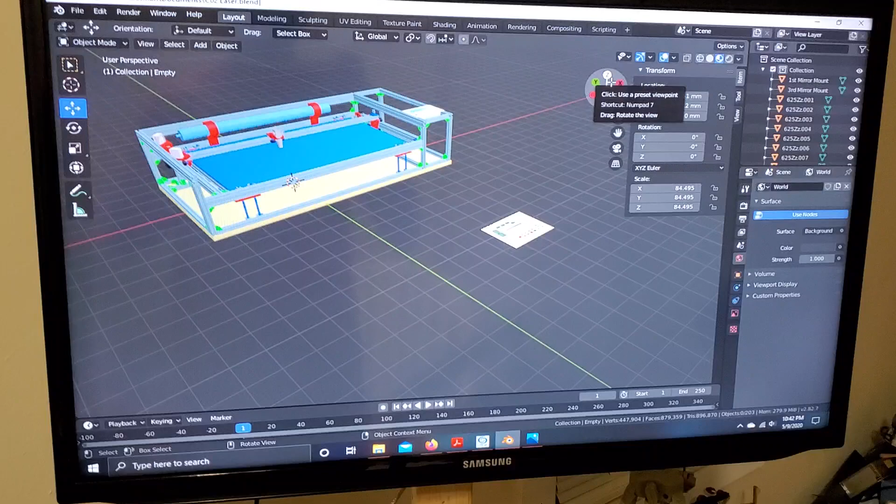Today we're going to be doing a little sneak peek of the new machine that I designed in Blender. Yeah, that's my favorite program. You guys know what it is.

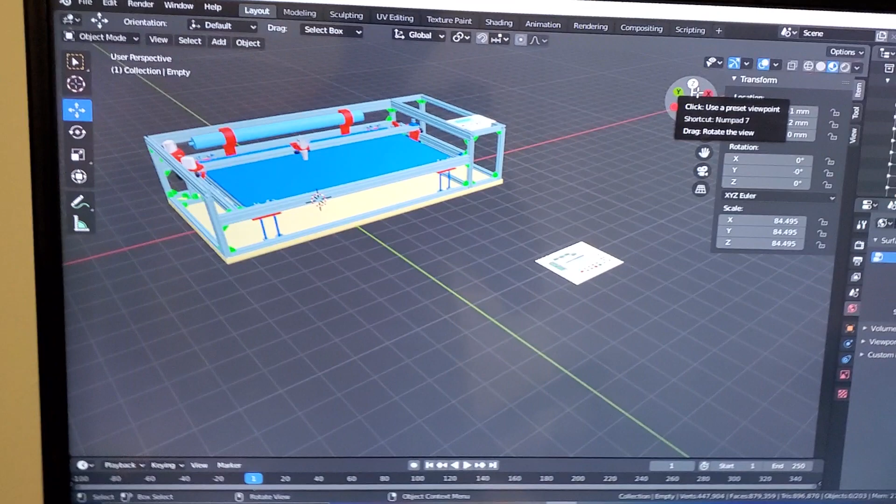In this design, I am making a CO2 laser cutter. Now you're probably wondering, Lee, why the heck are you making another machine? You want to know why? Because all the stuff I want to make has to do with this machine, basically. I am making a company called Animate Every Day, and it's really pretty much made. I just have to start making the items.

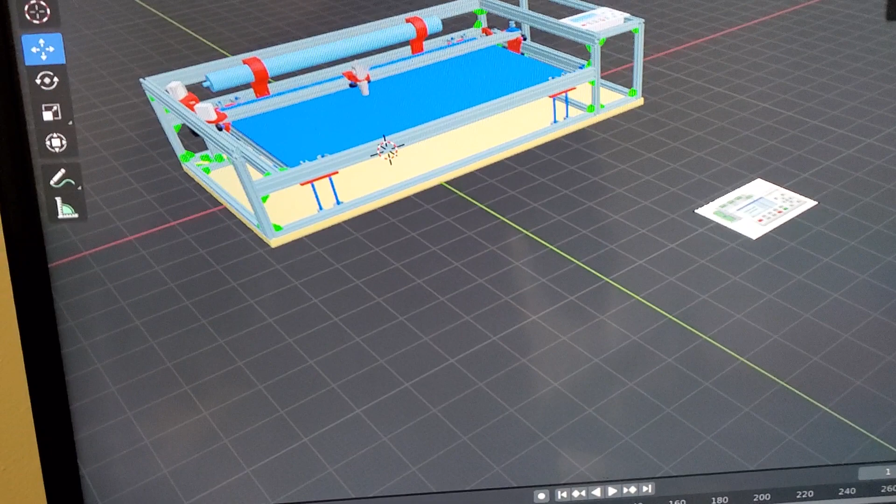I have a lot of plexiglass from another job from way back in the day, just laying around. I want to use that to make the materials for the stuff I want to design for you guys to buy. The laser I have is a 5-watt laser on my CNC machine that I designed a few months back, and it's not the best. It can't cut out clear acrylic, which is mainly what I have. So, screw it, let me get a CO2.

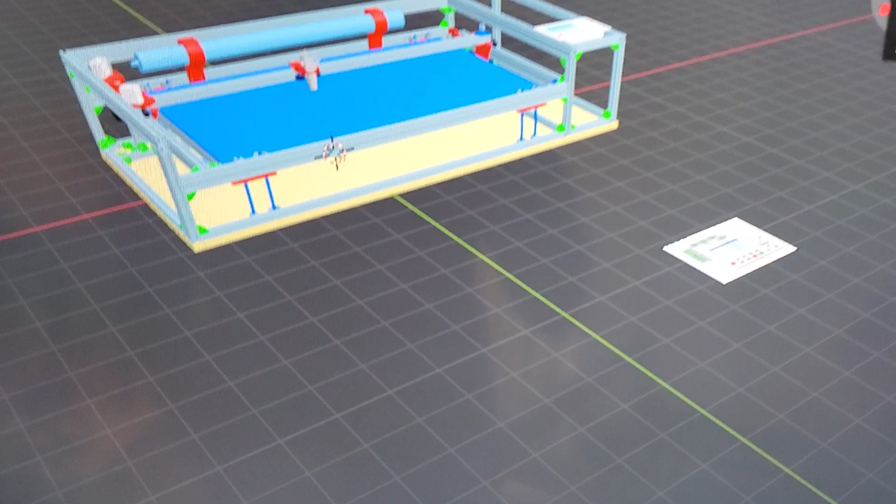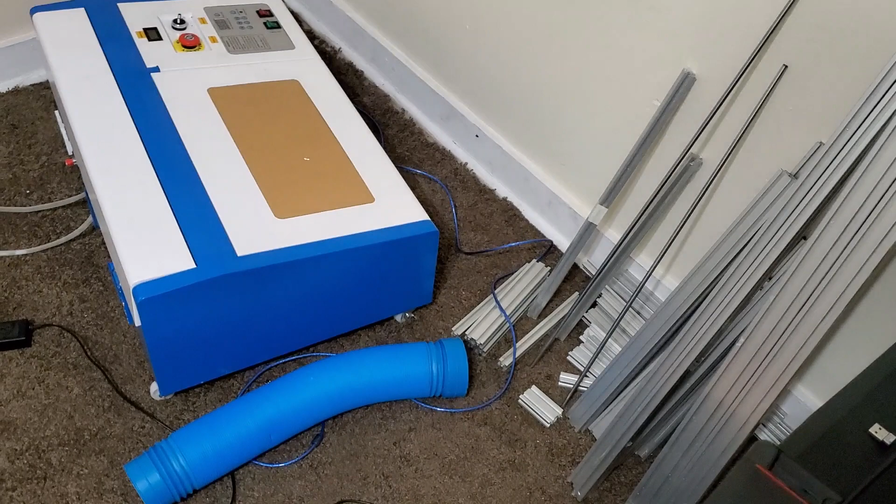So, as everybody does, we look onto the internet and find the K40 laser engraver. Fantastic machine, I guess. A lot of people have their comments about it, but it's a 40-watt laser engraver that theoretically can cut through clear acrylic plexiglass. Now, it's a 40-watt laser, and it's infrared, so you can't see the beam of light.

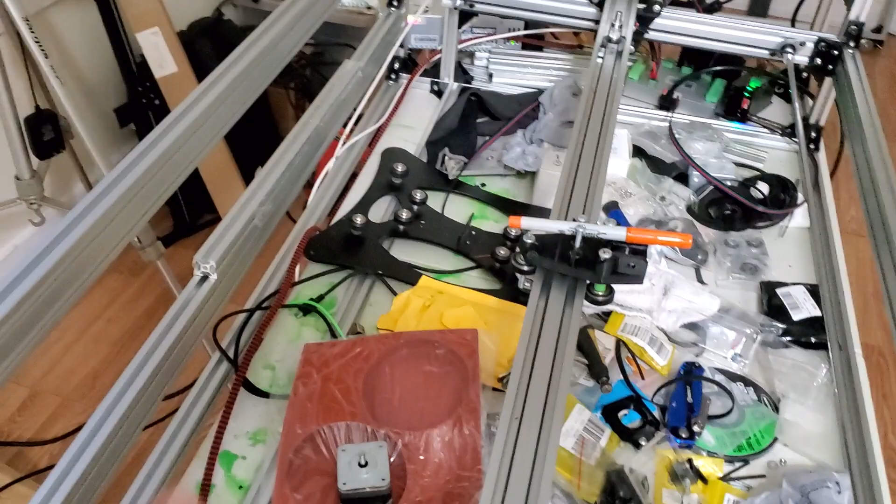I bought this off a guy on Facebook Marketplace, at a steal too. It was only $300. Usually they go anywhere from $320 to $350 new, but I had to wait for shipping and all that. No, I just went and picked this up, and it's basically brand new. Literally, it looked like I took it out of the box, to be honest. It still had packaging foam on it. The guy said he bought it for a project, but never got around to actually using it.

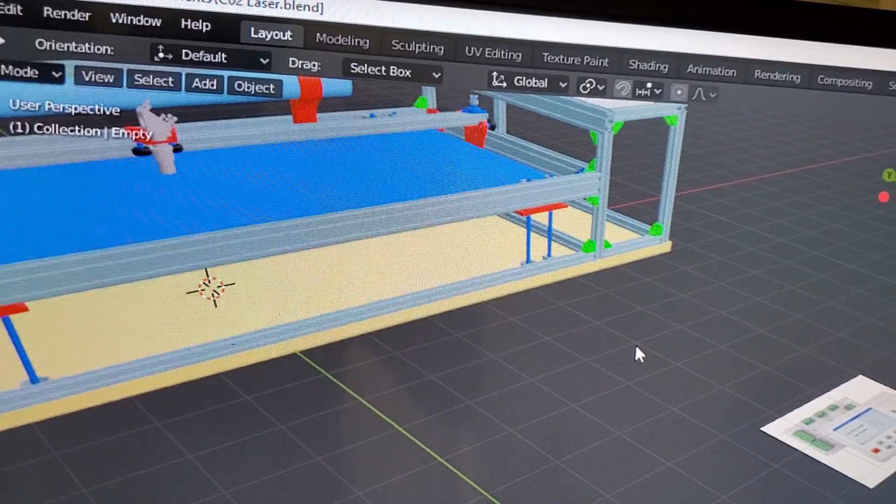Here in the machine, we have aluminum extrusion, 20 by 20, 20 by 40, and then some brackets here that hold the V-wheels in to allow it to travel. I designed these brackets back here. I didn't design everything, I just tweaked what I could from other designs I found and made it work. Blender helped with all that.

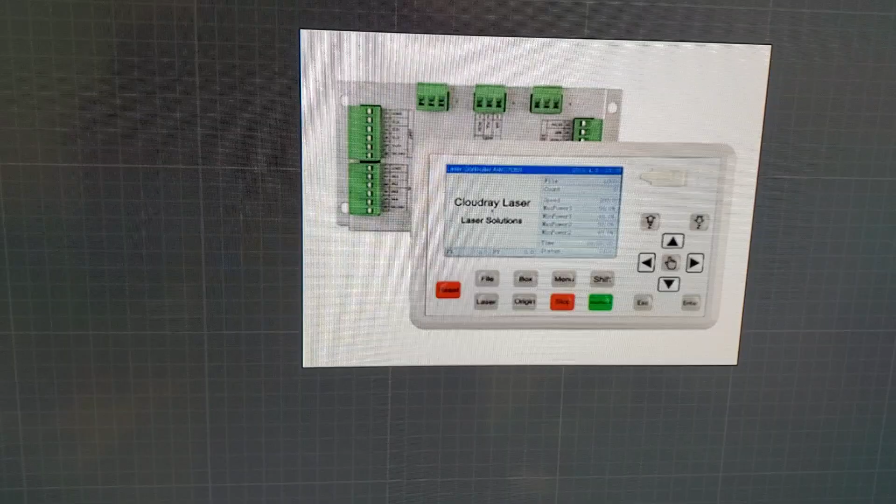What's great about this one is it's a 32-bit processor, so it's faster processing than those regular Arduino 8-bit processors, like the Mega 2650 or 2560, something like that, I forget. All I know is it's faster processing.

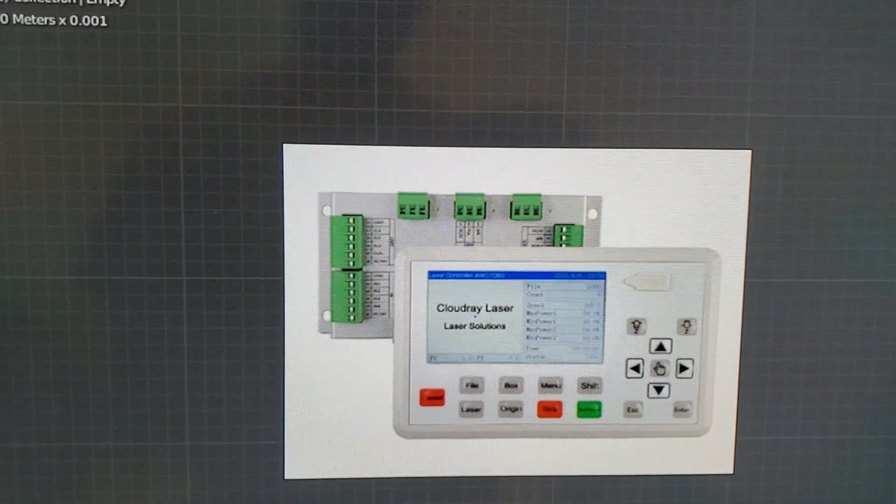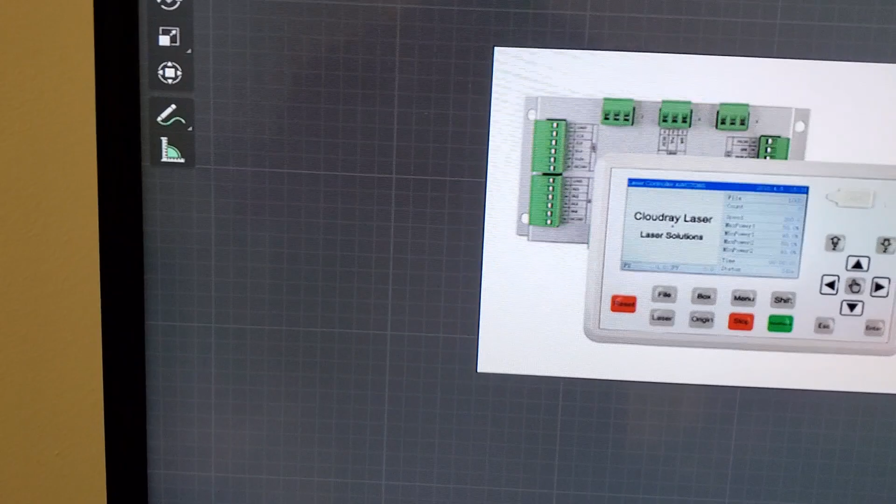This doesn't need a computer. On top of that, you don't need a computer to update the firmware to allow it to know how fast it needs to move, how long it can move, like the length, or where your travel speed amount is.

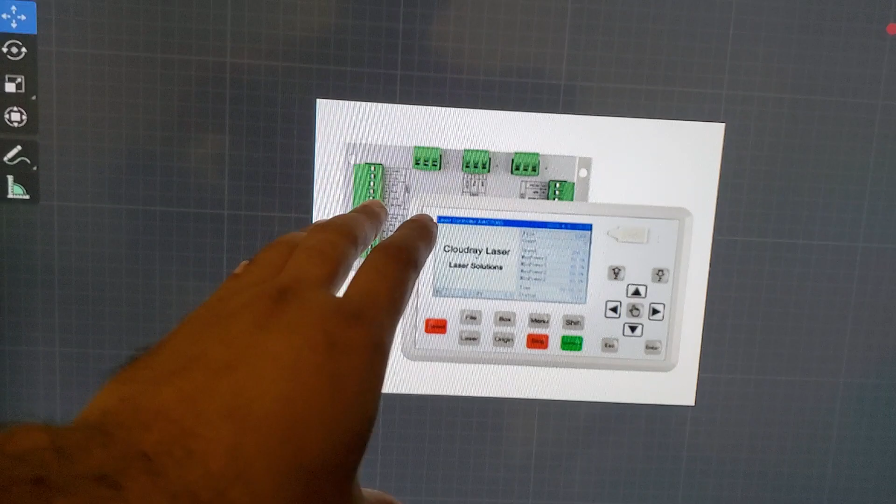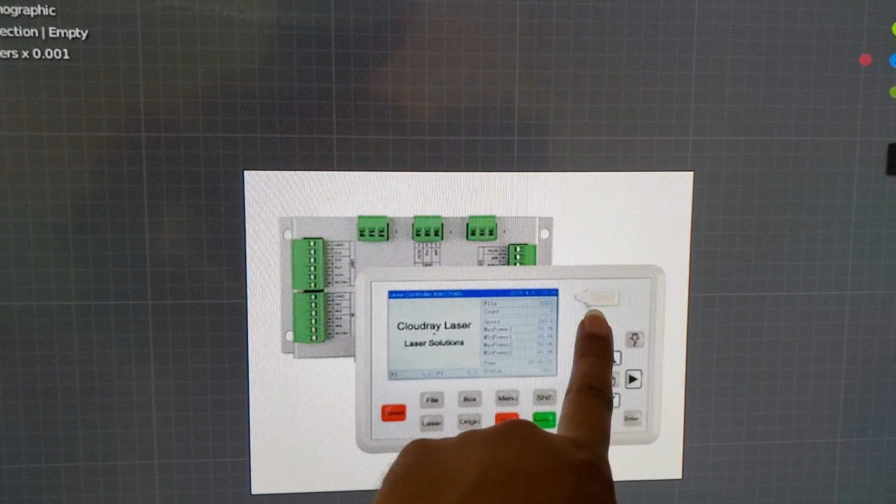So if you can do 1,000 millimeters but it's only set for 500, you can change that here inside the controller itself. Also, if you have a job on a flash stick, like a USB storage device, you can plug it into this USB port and print straight off the drive itself, so you don't need to connect this to a computer at all. It's completely standalone, which is fantastic because nobody wants to sit for hours waiting for a part to print out or cut. It saves on power too, because you don't have to have a computer on the whole time. Anyway, I designed this part completely from scratch, and it's exactly the same replica as the controller itself.

Now, it's not grouped together all in one mesh. These are a bunch of different meshes just sitting in place, but it's fantastic, so I like it. We have the reset, stop, start, the arrows up and down, Z up and down, and the USB port hole.

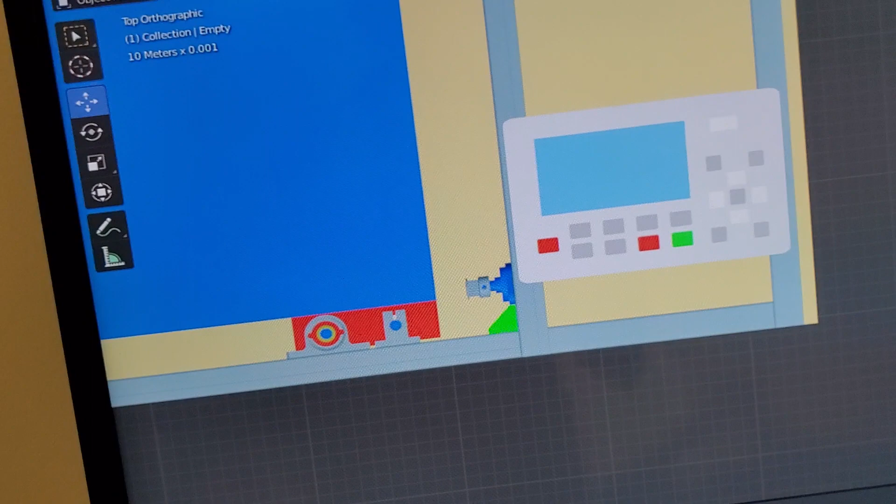Everything is literally the same as it would be in real life. So with that being said, this machine was based off this piece of wood. I have a 2x4, a 2 feet by 4 feet sheet of wood, and that's where this is going to be sitting, like a table.

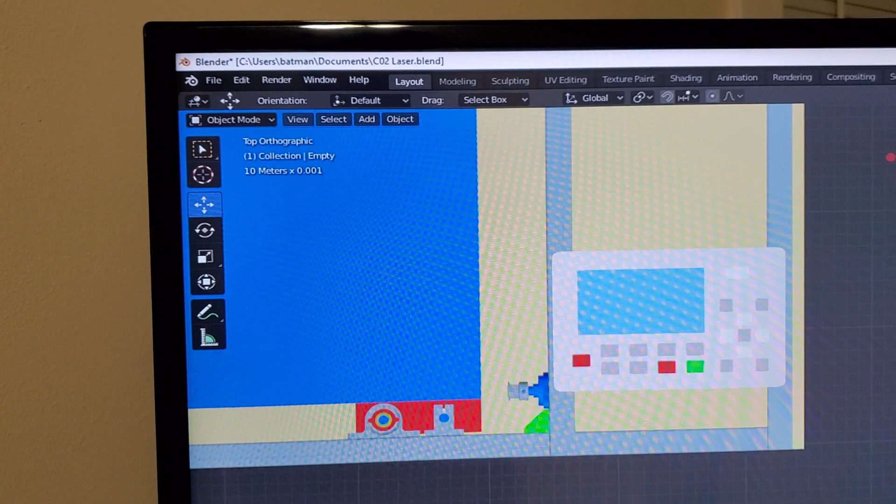I wanted to make sure the machine was really compact so I could get the most cutting space possible. The machine won't need extra aluminum extrusions for extra length or anything like that. I try to do things really cheap. So we go from this design to real life.

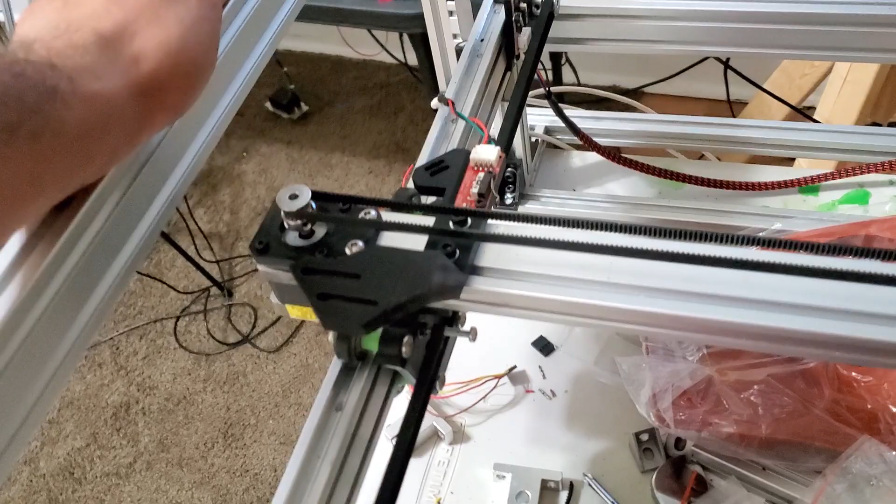Anyway, the machine can move on its own rails, so the extrusions themselves are the rails too. So you don't need to buy any extra parts.

Now I want to go super cheap for a few reasons. One of the main reasons is, since we're in the coronavirus, it's hard to get parts for 3D printers or CNC machines that don't cost you an arm and a leg. China is pretty much out of the water, you can't really order anything from them right now, and that's usually where most people get their parts, like Gearbest and stuff outsourced from China or Shenzhen. You can't get them.

So I'm using stuff I already had here from previous 3D printers and machines I was building over the past few years. They were just obviously storing up, so I was lucky enough to have extra parts.

Super simple design. So we've got 3D printer NEMA 17 stepper motors here and here, then we've got a 3D printer end stop here and here. What's great is I thought the end stop was going to blow, but it didn't. By blow I mean fry out, because I was pretty sure the switch would have kept working, but I thought for sure this LED right here was going to be broken or fry out, but it didn't, so I was really lucky.

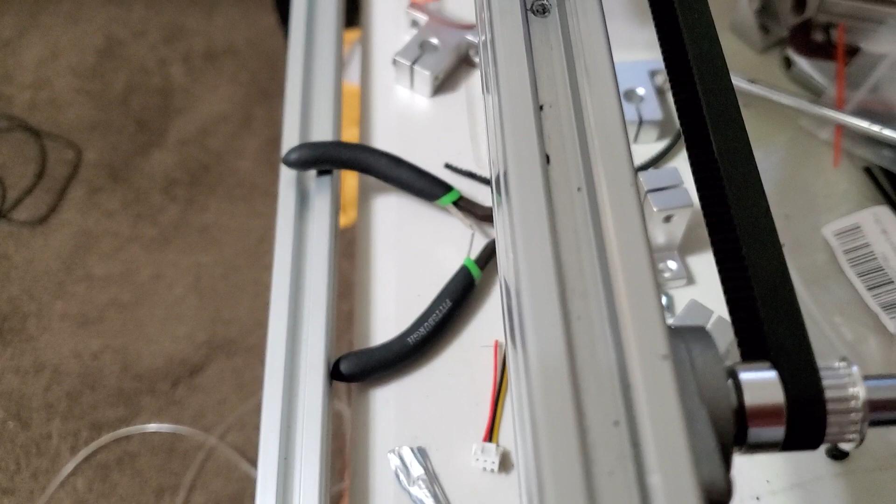Now, if you're new to this channel, I did a video on how to convert a T-slot aluminum extrusion to a V-slot. If you don't know what that is, I feel sorry for you, because you definitely need to find out if you're designing stuff like this. But I'll give you a little breakdown so we can speed through this. T-slot is basically an aluminum extrusion that has a completely flat surface, nothing in the groove. A V-slot is basically a groove that has a V-channel drilled through it to allow things to go through the center.

So you see that little cut right through there, and I'll show how to make that.

Now, the reason why you would like to do that is because we're using V wheels. They're cheap, easily available, I have a huge packet right over here. And literally it's silent too, because they're basically ball bearing or skateboard bearing-ish. They're a little smaller than regular 608 skateboard bearings, but they're actually like skateboard bearings. So they're quiet.

They run around this rubber boot, basically, or rubber grommet, that allows it to move through this channel really smoothly and easily. So you don't have a lot of noise coming out of here like you would with a lead screw. Even linear rails will be kind of noisy because the ball bearings are scraping against the insides of that metal housing, so it's going to be a little louder than a regular bearing.

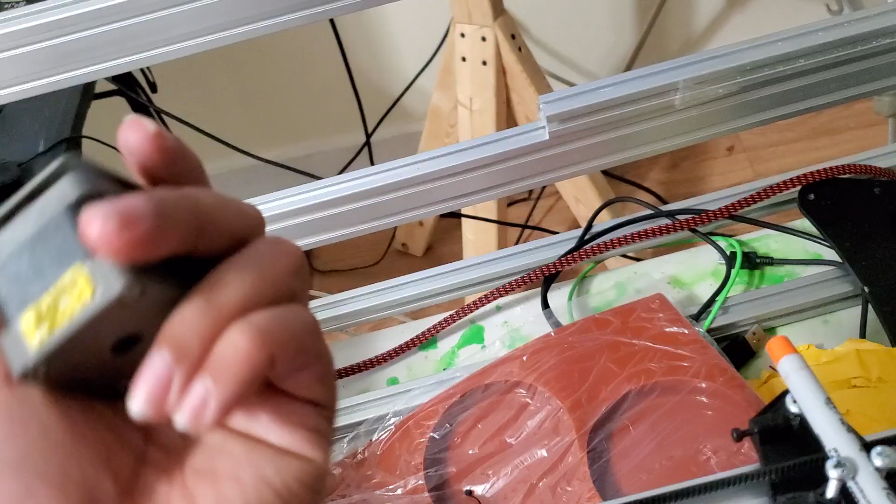Right now this machine is set up for just one stepper motor. For the Y, I do and will be doing 2 stepper motors, one on this side where you can see this belt, and one over here, obviously already on there. This one is broken, I have to get another one out of my office. I have plenty of those, so I'm not worried. But I'm waiting really on a pulley that fits this 5mm shaft and more belts.

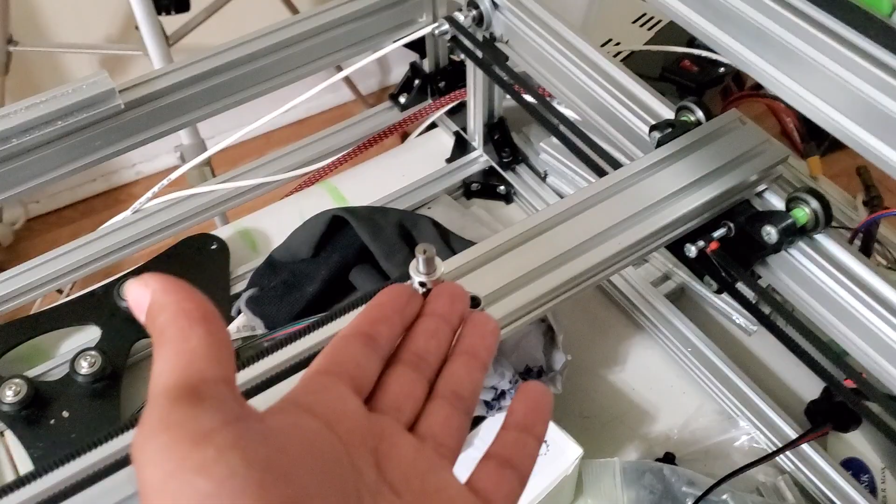I ordered a longer belt that hasn't come in yet, and the reason why I know for sure I need it is because the belt here is too small. I'm missing about 10mm over here worth of travel. I want to get all the travel I can out of my machine. And then also on this side, I'm not all the way on the end of the X, I'm like literally 100mm or more off. So I need to get the belt to move all the way down there.

Now, I do have a pulley here, and this pulley is connected to this bracket down here, the 3D printed PLA, nothing super fancy. And then I have an M4 screw that goes all the way through with another bolt on the inside over here. That is all zip tied up into this belt, which is pulled and tensioned to make it nice and tight, and then it's going onto this pulley. This is an 8mm diameter pulley with 20 teeth on it.

And it's going to connect to this. Basically, it's a skateboard bearing that's press fitted into a housing that makes it look like a pillow block. It's called like the KP08 or KL08 or something like that, I can't remember the exact terminology, but you can get a lot of these for pretty cheap. I got a whole pack of them from like Amazon.

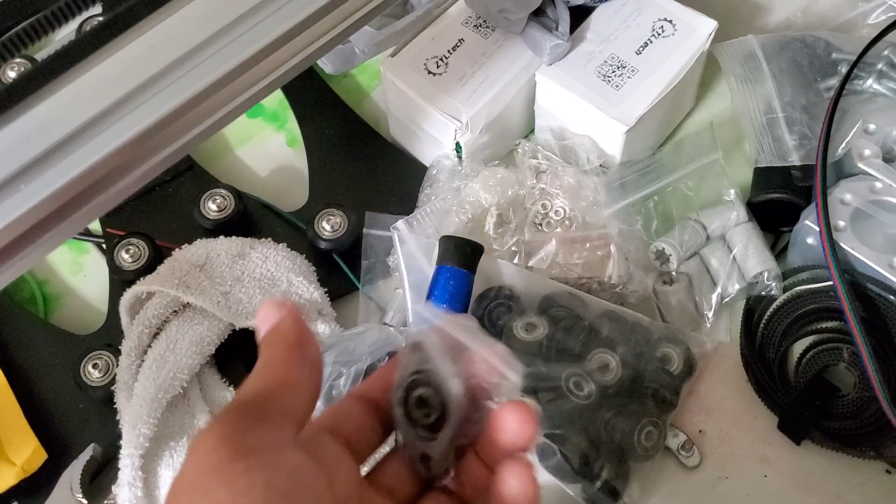So that's connected to this pulley here, and it has little grub screws that you attach to the rod itself, you screw it down so it can actually be mounted to this. This is an 8mm rod, goes all the way to the end, hits another pulley on a belt. Same situation as the other side, same connection as the other side with a zip tie, 4mm bolt, and then same thing on here.

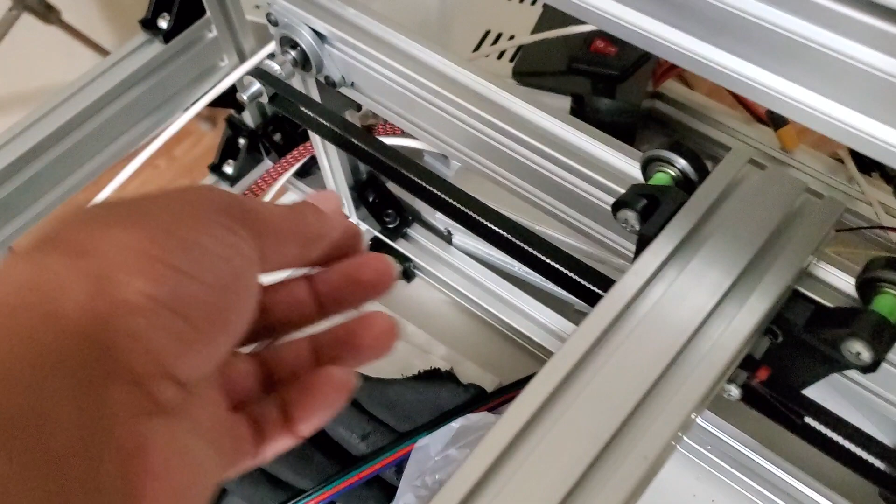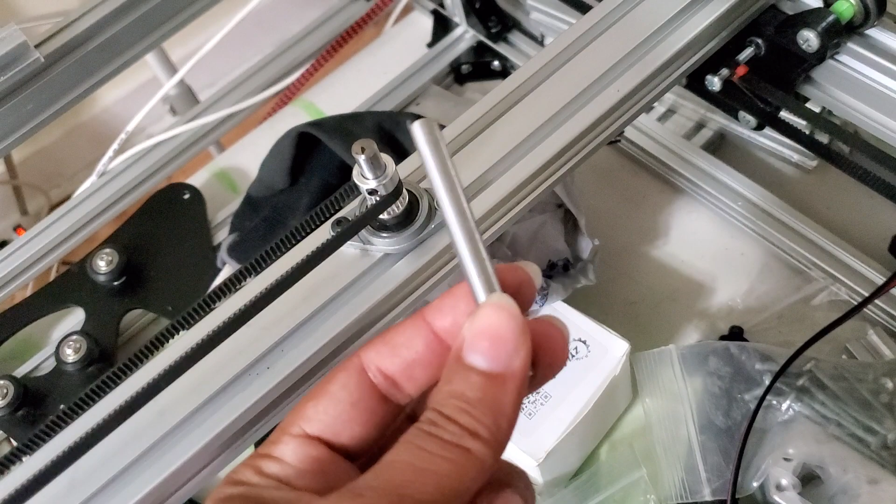I had to cut down the 8mm rod. I had another piece of it that I cut these little parts out of, something like this with an angle grinder, and then I smooth it out, make it look really professional and nice. Then I add it to here, and it makes another whole pulley. So when this motor moves, it moves both sides, and they're parallel to each other, so it makes it really straight.

And then this one is just by itself, on 3 of the V wheels, and this is inside its own V slot as well, and it goes all the way down.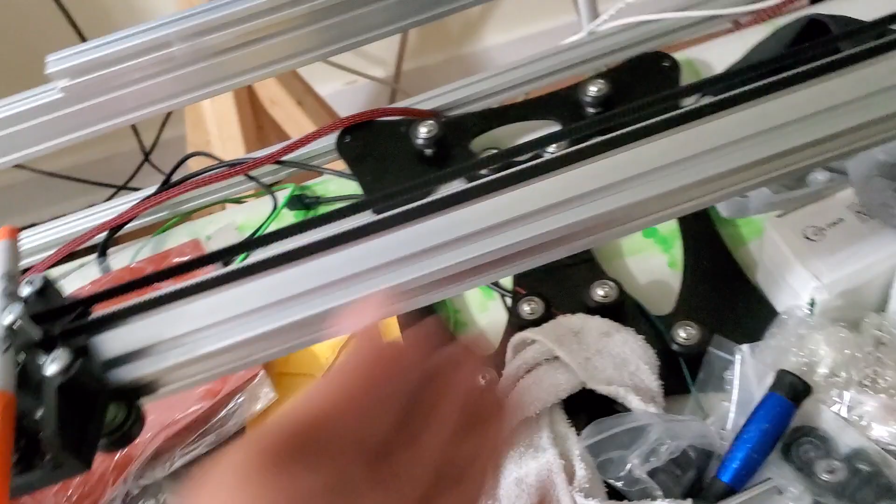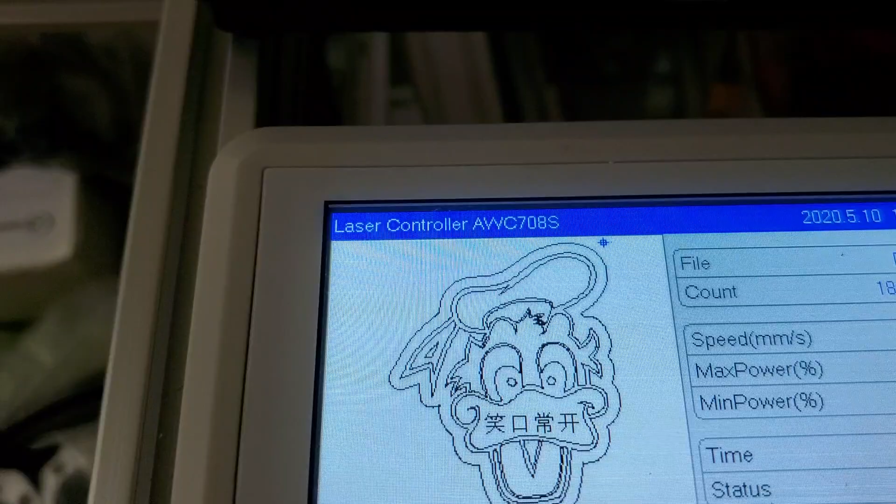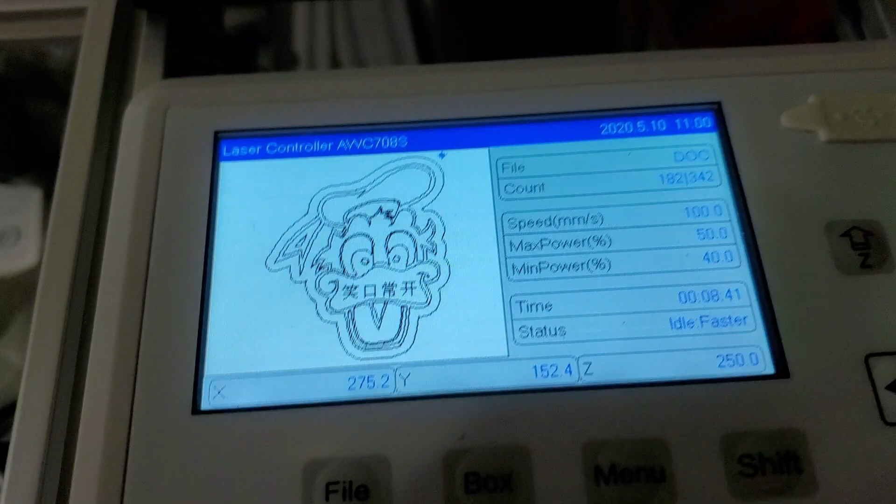So with all that out of the way, let's talk about the actual laser controller here. So like I said, this is the laser controller, AWC708S, not the C Lite, C as in Charlie. That one is the younger version, or older version of this one. Anyway, this is like the newer updated version.

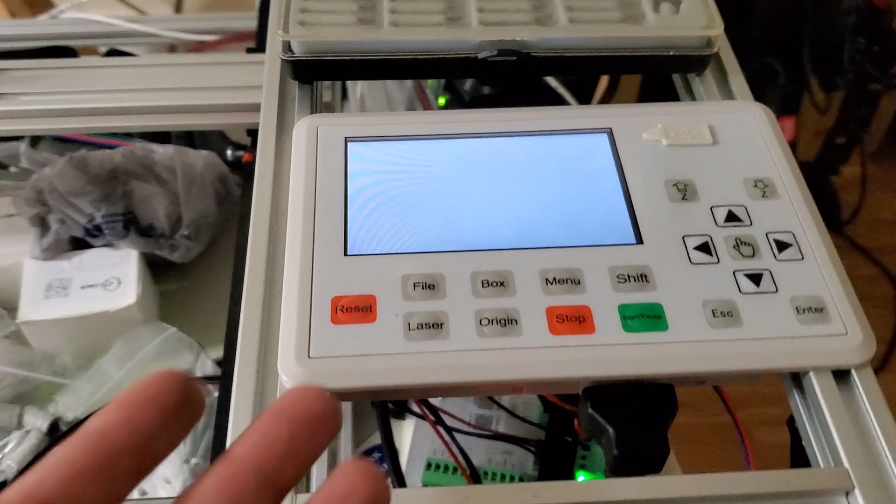The machine, if I press reset, it'll home. So once it turns back on, it's just like if you shut the power off, it'll do the same thing. It hits the end stop, and then this one hits the other end stop.

So Y is first, X is second, and then it does a little homing sequence, and then moves to the center of where it's going to start cutting at. Now the center to itself, it thinks it's right here because it's not going all the way down that way. I programmed it that way, but I will update it later when I get longer belts. And then it comes up with this weird duck character. Kind of looks like Daffy Duck, but I'm not going to get into all that.

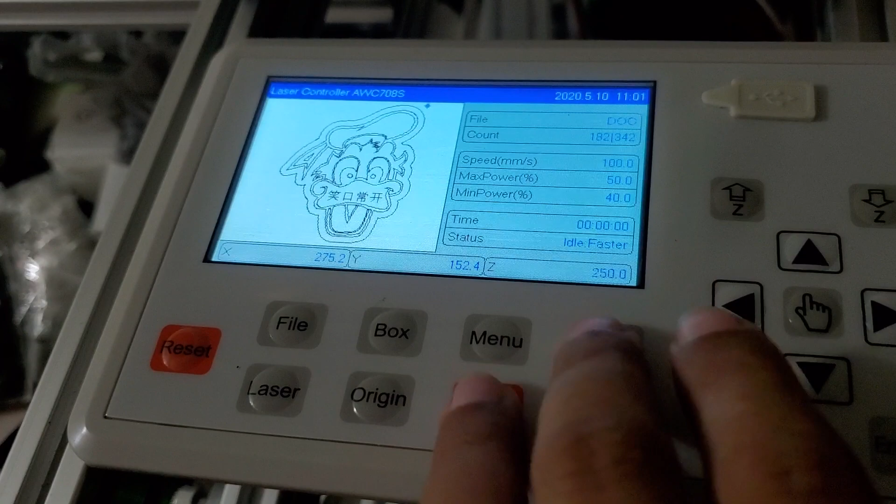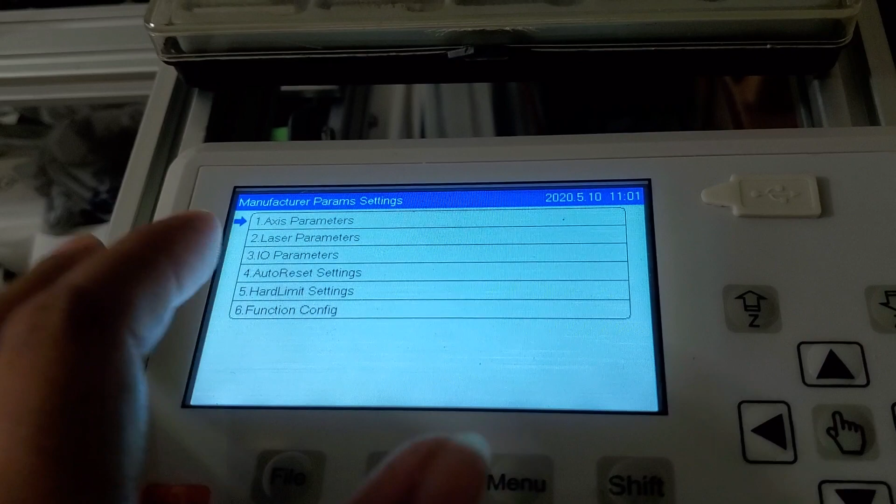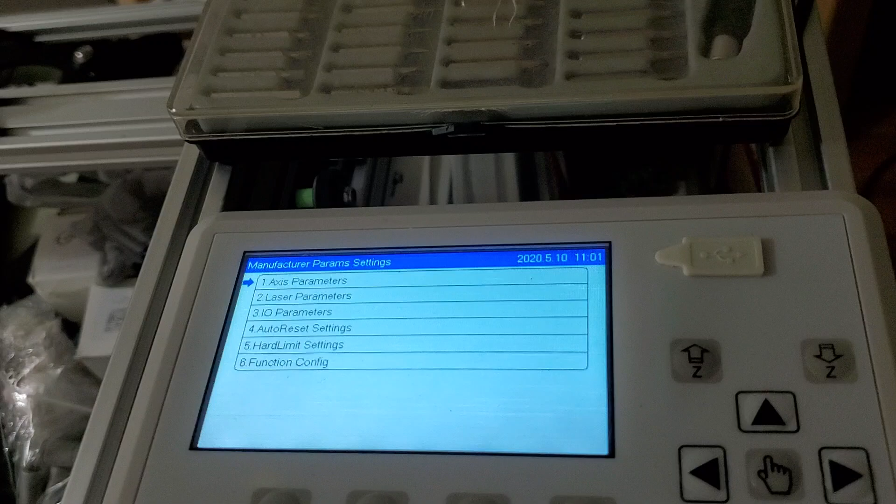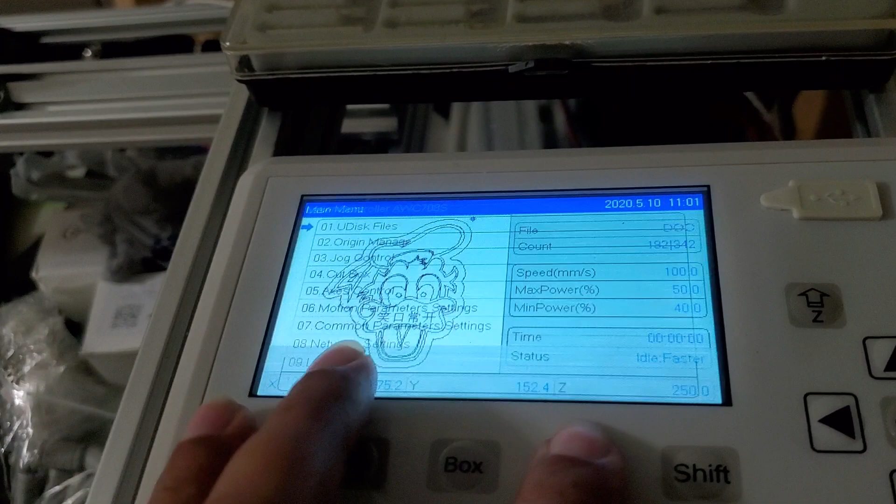Anyway, it's awesome because if you hit stop and start at the same time, you get the manufacturer parameters settings, basically, and you can change everything. This is where you want to go to change your speed for your stepper motors, the length of how far your travel is. So if you can only do 500, but it's set for 450, you need to set it up correctly to get to that 500. You can do it through here, usually. Unless you have to go to menu, and then you can change some other stuff in here. So there's 2 basically different menus.

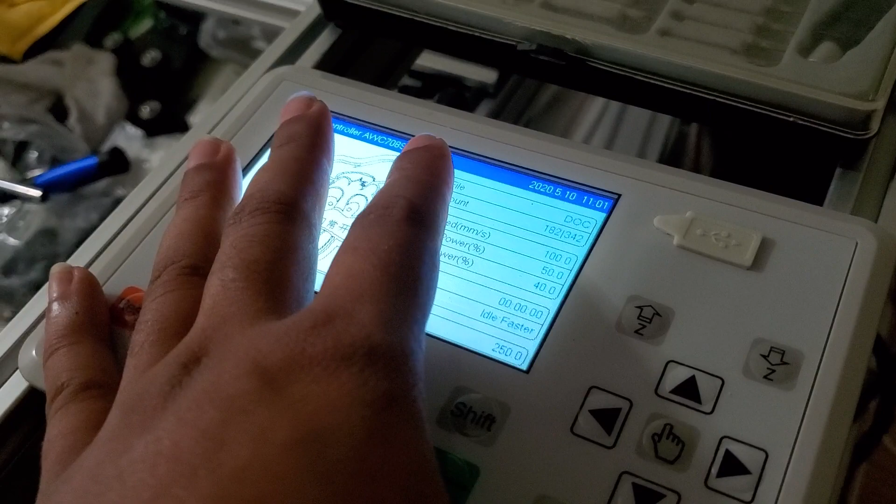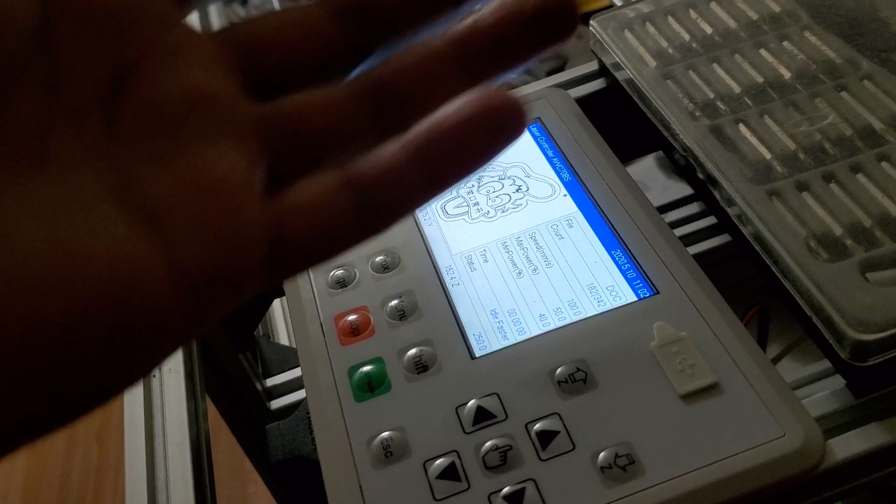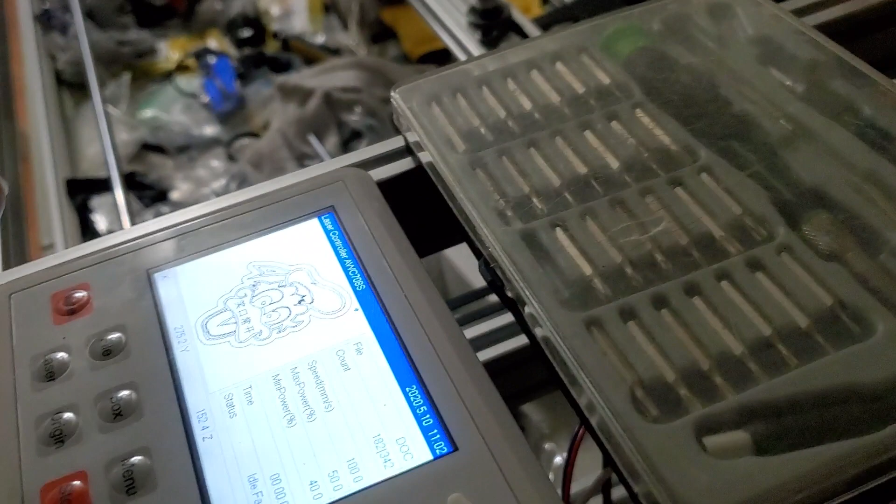Now, the controller board for the laser is like the only real laser part that I bought, other than the laser CO2 cutter thing that I have to take apart and put into here. But other than that, all the other parts were 3D printer parts. So we got skateboard bearing, pillow block bearing things, GT2 pulley belts, V wheels for Ender 3s and CR10s, 3D printers. And then we got, basically, an Ender 3 power supply.

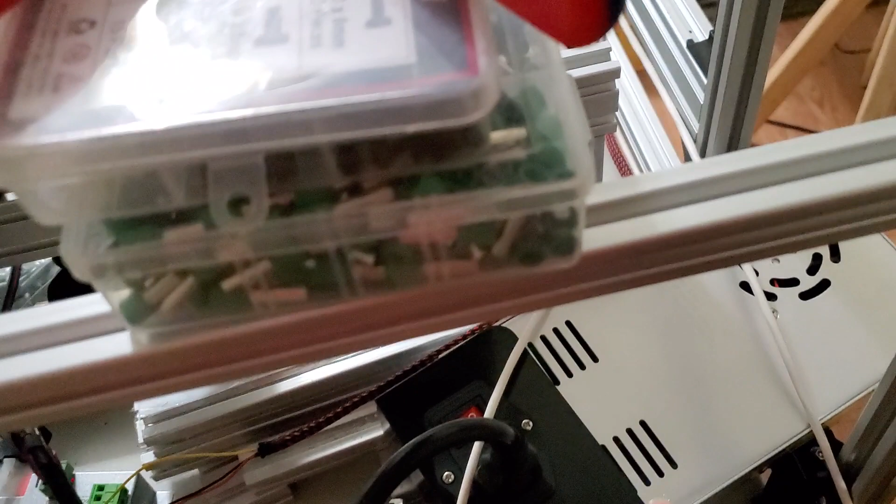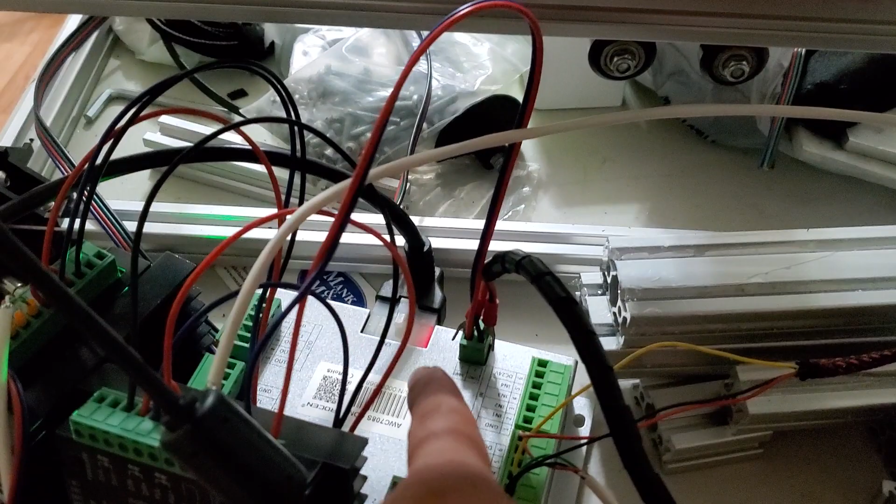I bought this off of some dude on eBay for like 30 bucks, I think, or less than that maybe. And it's a 24 volt power supply. It gets fed in through these wires here, goes into the power port. And then I have another jumper connecting the stepper motor drivers to this, so these are powered up with 24 volts as well.

And then you can actually pull all these out. These are the stepper, the 3D printer end stops that I just showed you. These are the connections, but you can actually pull all these out and adjust them and then pop them back in, so they're plug and play.

And then with that being said, guys, that's pretty much the machine. And if I do a reset, it homes. If I want to move it, it will move. Moves pretty quick, I believe. I have it set up as fast as it can go without skipping steps. So then you can set an origin, have it start printing from that location, or cutting from that location. 3D printer language, printing.

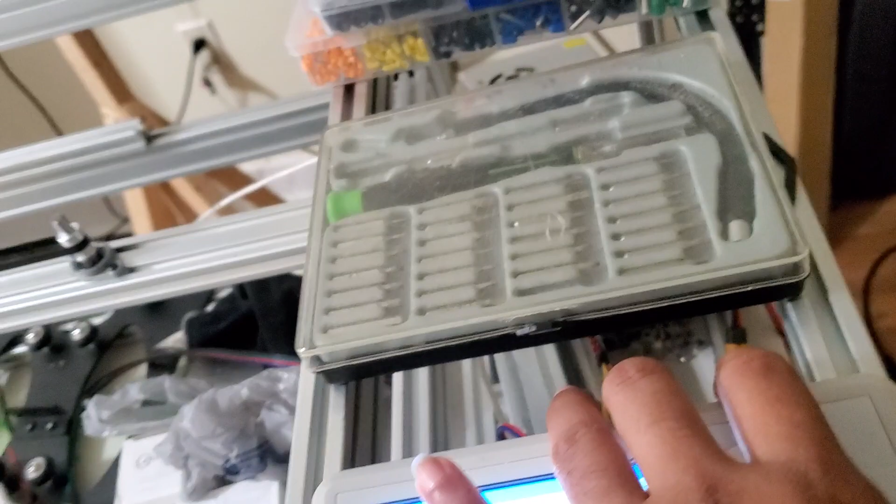But yeah, clearly it would work if I just press. This is going to be the cool part about it, but I'm going to wait a second. Let me just show you the bed really quick.

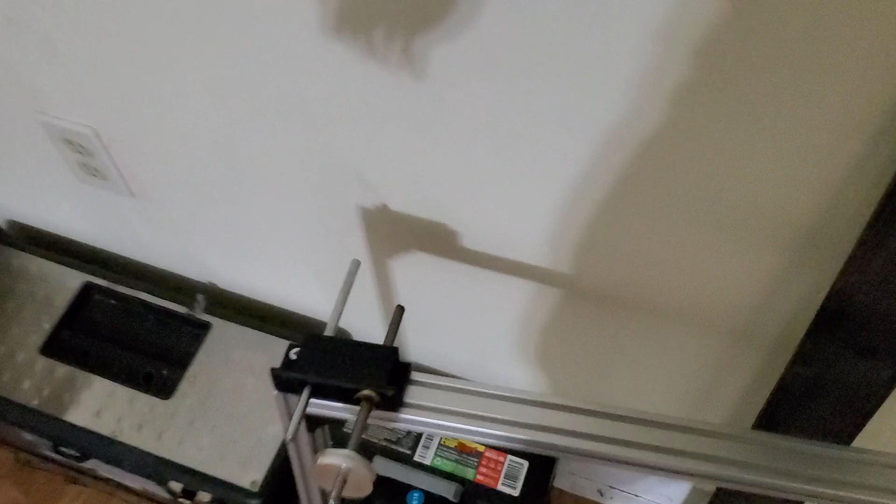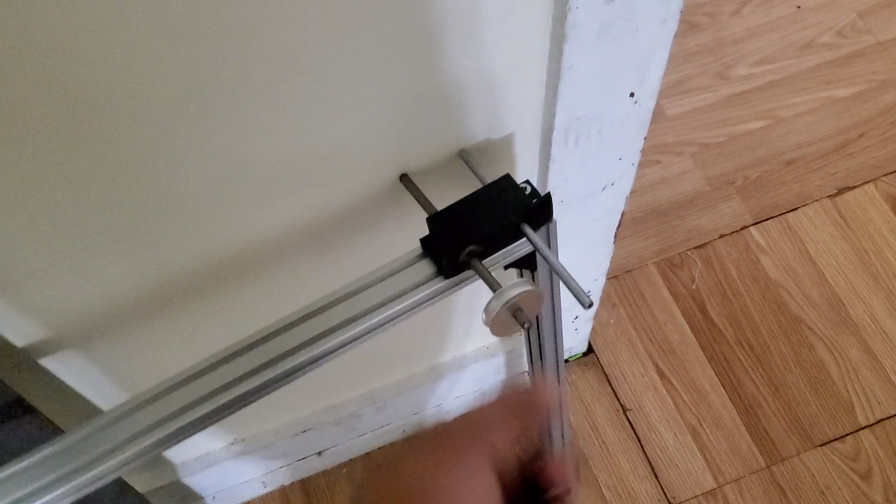So the bed is actually made out of 20 by 40 aluminum extrusions with 3D printer lead screws. These are 8mm lead screws with a T-nut, the 8T8 nut or something like that. And then we have 8mm linear rods with bearing blocks in there. And then we have a 60-tooth pulley on all four corners. And then these are actually threaded inside of this extrusion. So I actually threaded and tapped the holes and then put M6 bolts in here.

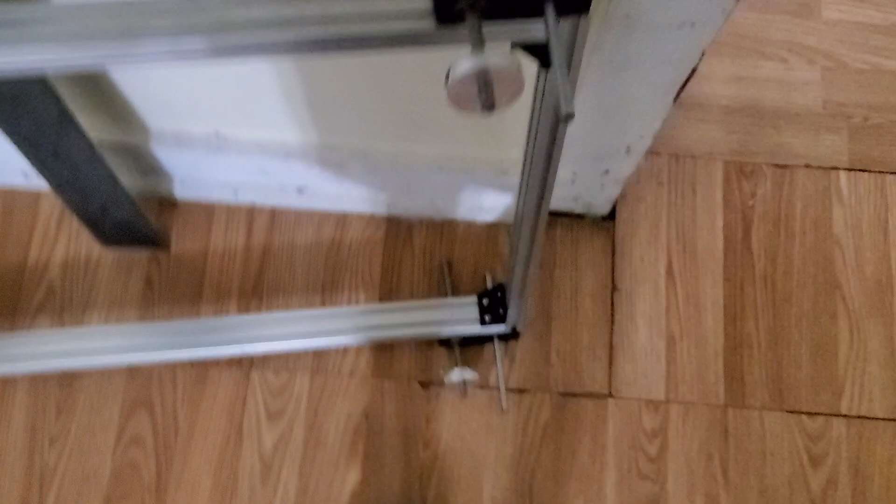Then I'm going to put an M4 bolt and a lock nut on this side here. But other than that, that's the size of the bed. And it's pretty big for the most part. I mean, honestly, I'm not exactly sure how big it is because I wasn't worried too much about measurements. And it varies because of material and all that. But I wanted way bigger than only 11 inches by 8 inches, and this definitely is way bigger than that.

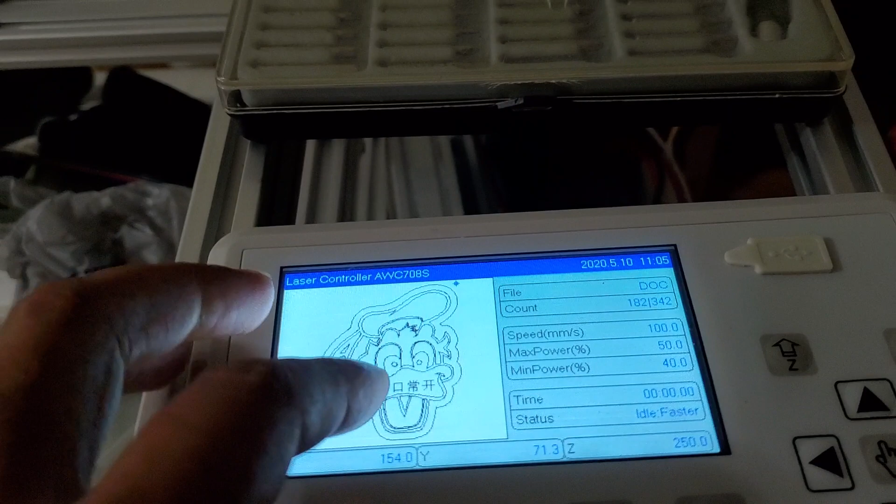Anyway, so let's go ahead and show you guys really quick how this works. Now that we have everything programmed and kind of running and all that, if we hit start, this comes up with, look, once you turn on the machine, you'll get this duck, and you can actually use it to test out your movements.

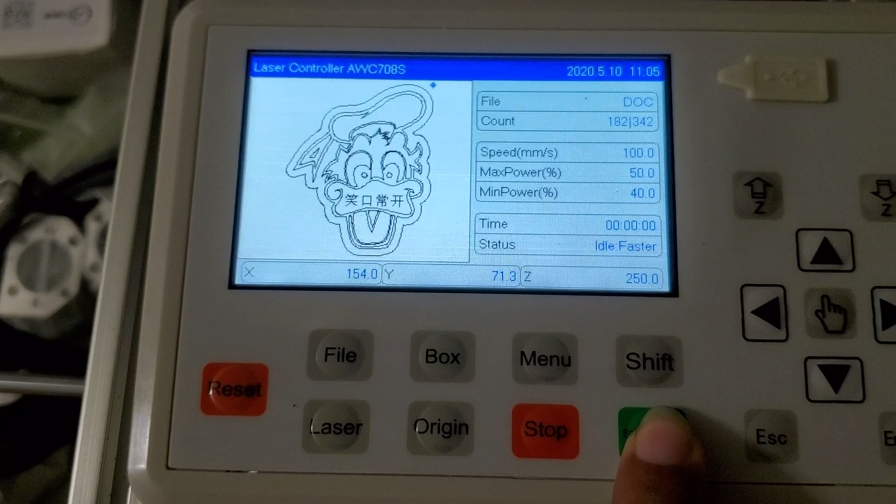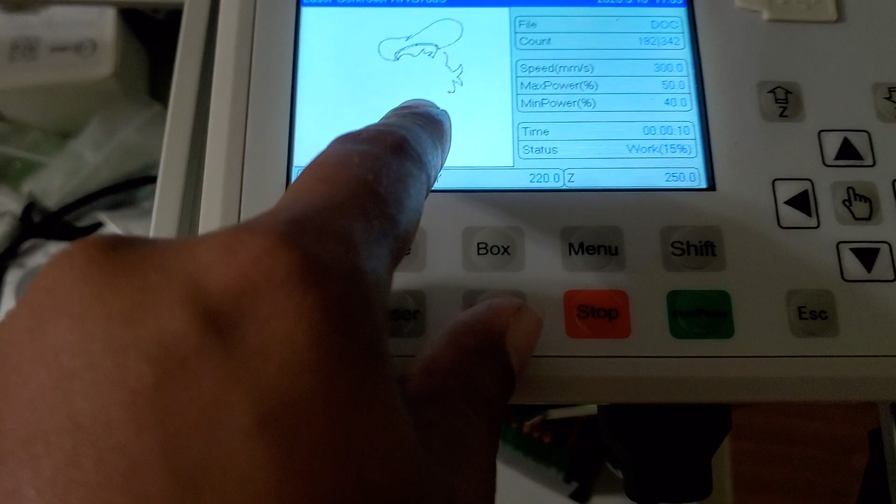If you just hit start, what's cool is it draws it out in real time - it goes to the center first since I didn't set the origin. Literally, if you slow down the speed, say you're moving at 50 millimeters a second, it will be a lot slower than this. Or if it was 1,000 millimeters a second, it will be a lot faster. It matches the movement of whatever your speed setting is, which is fantastic.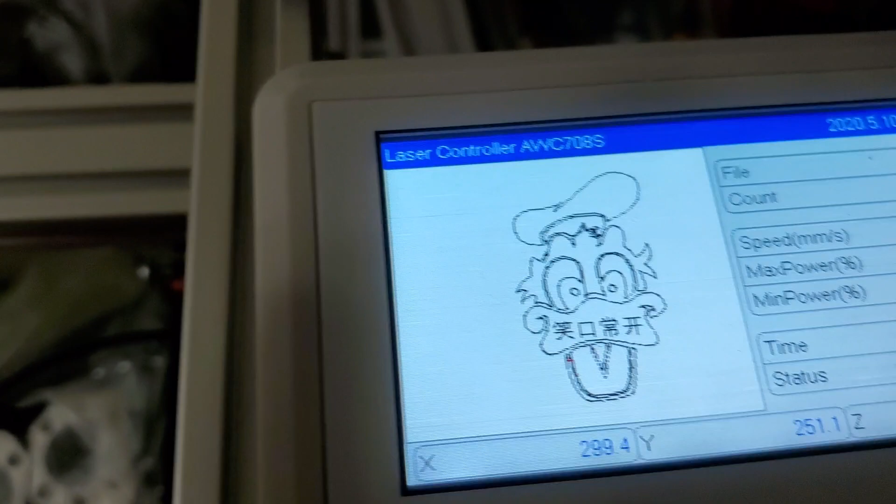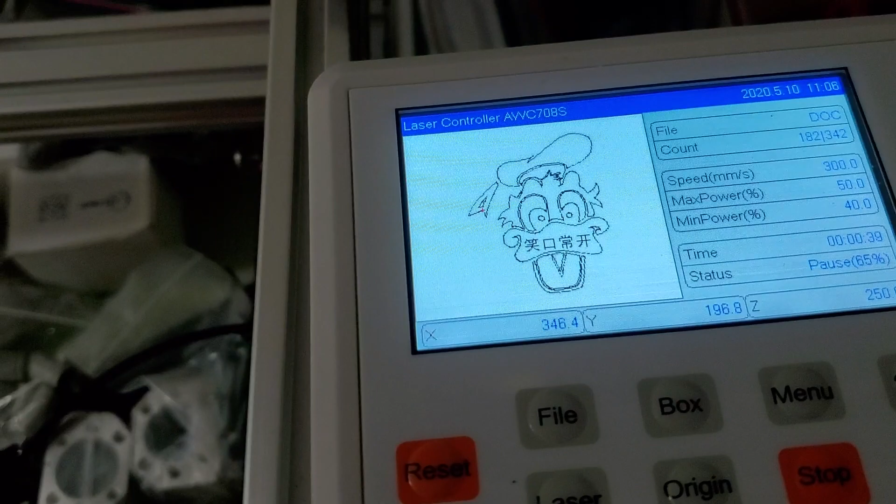It shows you exactly where you're at. So if you're not wanting to engrave or cut out a part and you think you messed up and need to pause it, all you have to do is hit pause, take the material out, and be done. You know exactly where you need to pause at. Say you didn't want that word there - pause it, take it out, you're good. Then you can start back up again, as long as you know exactly where it's at.

So this machine is fantastic. Now I need to re-3D print a few things. This needs to be re-printed because it was too tall - I don't want my mirror getting too close to the roof of the machine. And this needs to be re-printed because the hole is too big for my CO2 laser head, and on top of that, it's too thick for it to connect. I already redesigned and tweaked those, I just have to print them out. And then I have to print one more of these motor brackets.

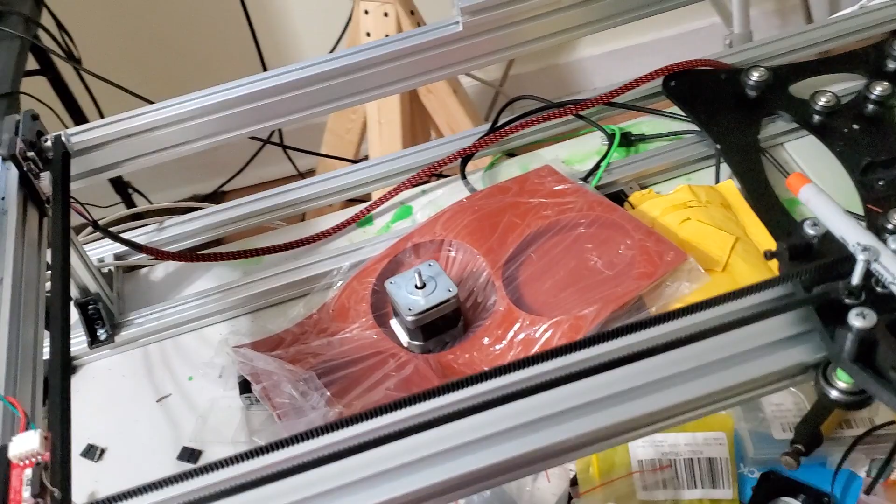That'll be it for the printing so far, other than the laser tube mounts, and probably some door handle hinges or something, because I'm going to have a door that lifts up. I may have some gas struts in the corner to keep it up there so I don't have to worry about it. But at the moment it's pretty good and running pretty smoothly, I gotta say. You can't even really hear it, right?

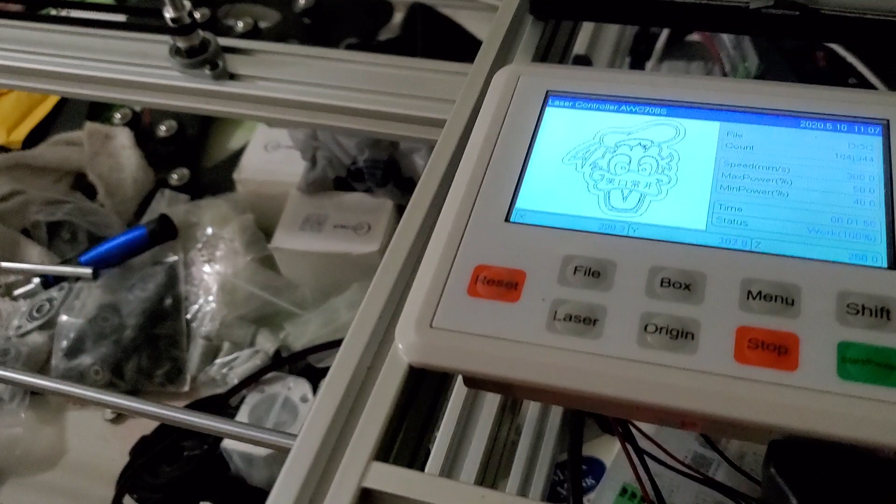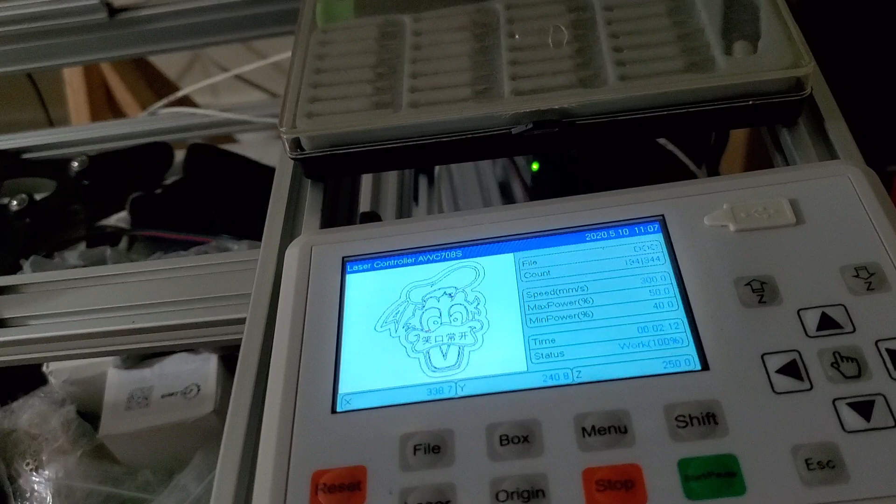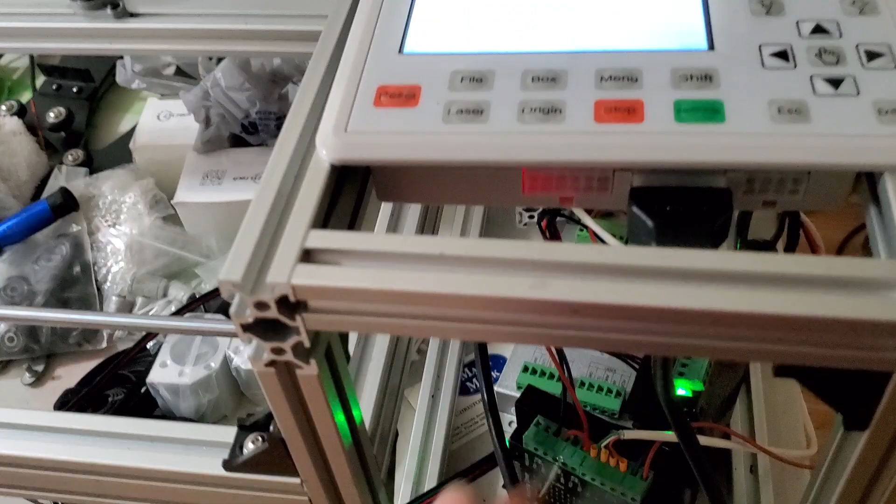Barely. And what's great is these aren't even Trinamics. Usually in the 3D printer world you're running TMC2208s or 2209s or 2100s, so the stepper driving is silent and a lot quieter than the stock stuff. But since this is a 32-bit processing motherboard doing super fine precision process work, it's not straining the stepper motor pulses, and this is set at 32 microsteps. So I'm at the highest microstepping setting that allows ultra fine details, and it's still moving very quietly - I'm very surprised about that. It's fantastic, and I haven't had any issues yet. I had a few skip steps, had to adjust settings at first, but everything's running fantastically.